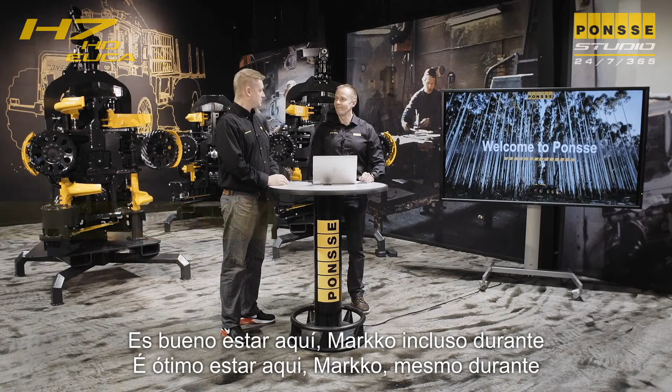Nice to be here, Marko, even during this kind of difficult times. So we are happy that we are able to launch new products during this kind of period. But we have been able to do it, and we have products in the forest. So things are still coming forward. Exactly. Even though we have this kind of difficult global situation because of coronavirus.

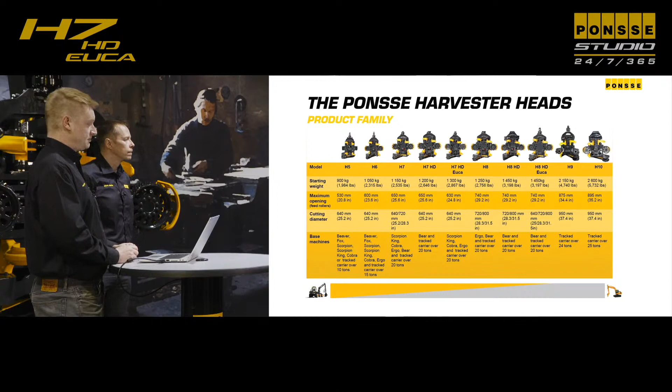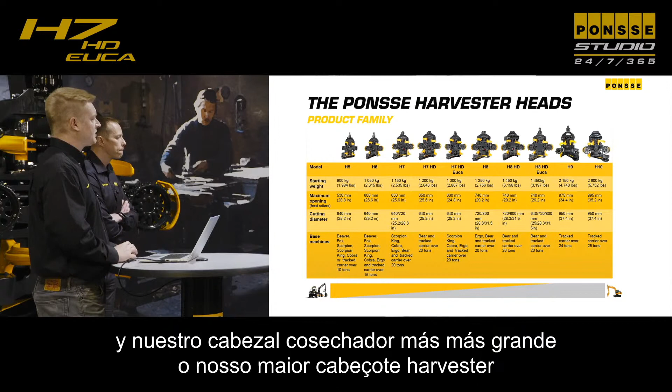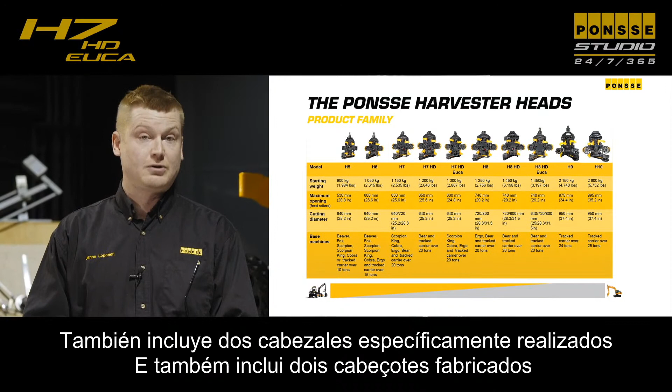It's a very nice head in the thinning operations, even in the smaller log trees, and our biggest harvester head is the H10. And the H10 is already so big a head that you need to have a big track-based machine for that. So our scale is big. It's also including two specifically made for the eucalyptus debarking operations. So debarking is very important for Ponsse, and we have the right products for debarking operations in the plantations.

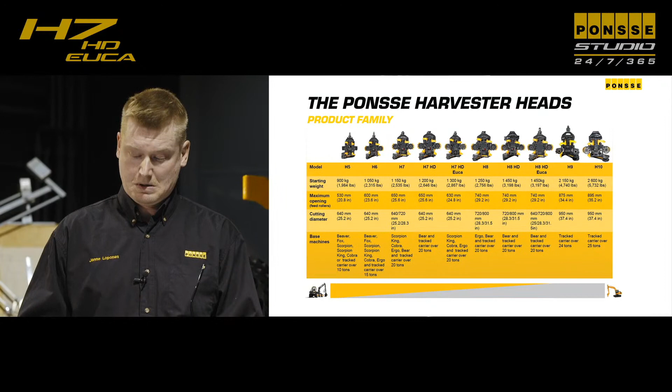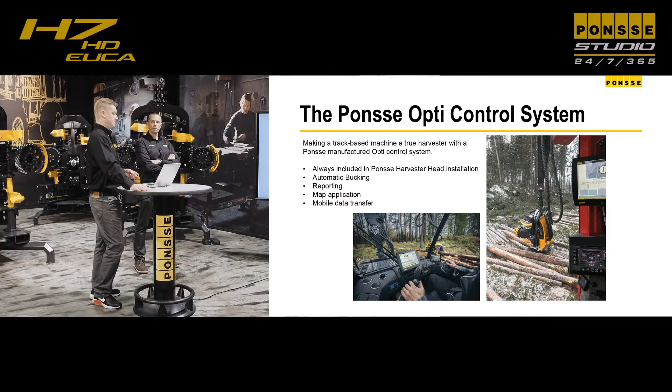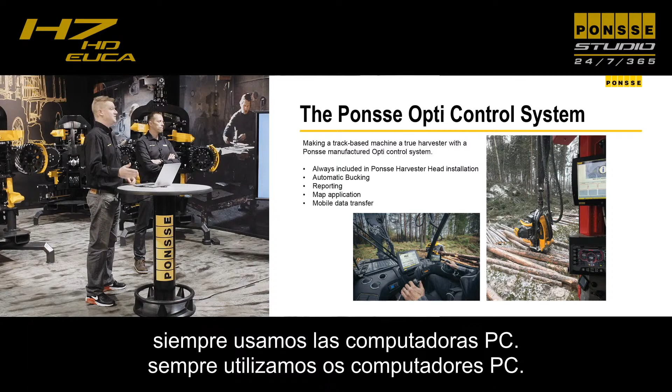Then a few words about our control systems. So Ponsse is designing and manufacturing all control systems. Epec is our subsidiary in Seinäjoki which is manufacturing our modules, PC computers, and even with the loose head installations we always use the PC computers. We don't have any simple version that shows only the length and the diameter. You always have the whole package when you have a Ponsse product.

Then H7HD EUCA, so this is the robust head, heavy duty head. We're gonna talk more details about the heavy duty later on with our engineering manager, Markku Huttunen. But it's good that everybody is aware. This product is available to our own wheel-based machines, Ergo, Cobra, Scorpion King and the Bear. And then, of course, for the different kind of track-based base machine solutions. Our recommendation is then 20 tons or bigger track-based harvester is suitable for our H7HD EUCA.

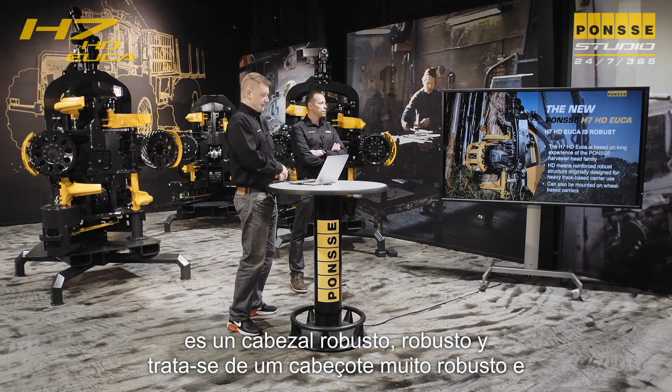The reach of the crane or base machines for the H7 heavy-duty EUCA are exactly the same as previous H7 EUCA. So new product, even it's more heavy-duty, there is no limitation in our base machine. And like I already told earlier, it is a robust head, and heavy duty is not just the two letters in a Ponsse product. It's this really heavy duty frame structure, and we want to show you that here in real life behind me later on.

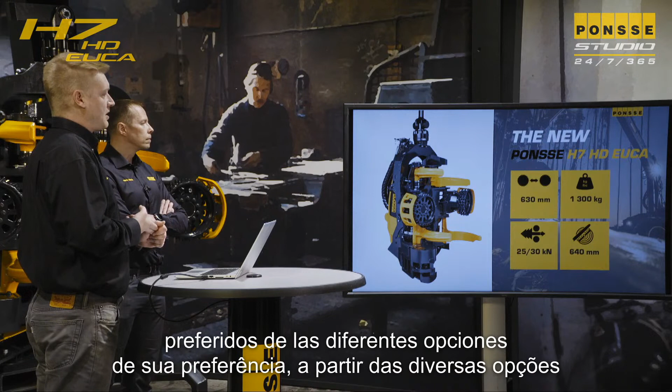Just the basic technical details about the product. The roller opening 63 centimeters, so plenty enough for the EUCA plantations. 1,300 kilograms is the starting weight, and then when you add the rotators from the different options we have to offer, and some options, the weight is coming a little bit higher, of course. We have two different kind of feed motor options.

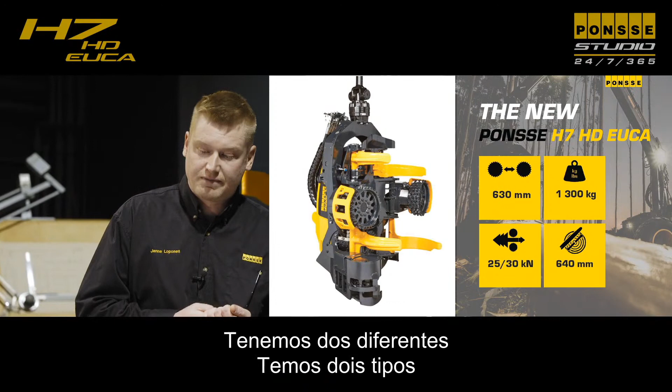We have 25 kilonewtons or 30 kilonewtons torque motors available, based on your condition. There are plantations where the trees are bigger than in another plantation. That's how we can really make a right setup for you in your conditions.

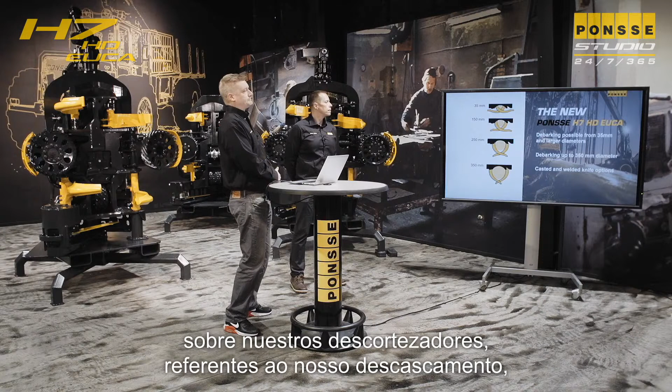Here we have a few pictures about our debarking diameters with our debarking knives. We can see that we can go all the way down to 35 millimeters with the debarking. And then our recommendation is up to 35 centimeters. This is the optimal, suitable debarking range for the H7HD EUCA.

But of course, every plantation also has those bigger trees on the side of the road, so you need to be able to cut them as well. You can do that with the H7HD EUCA also. When your main plantation tree size stays below 35 centimeters, then here is the right product. Then I believe, Marco, we have our product line video, how we manufacture these Ponsse harvester heads.

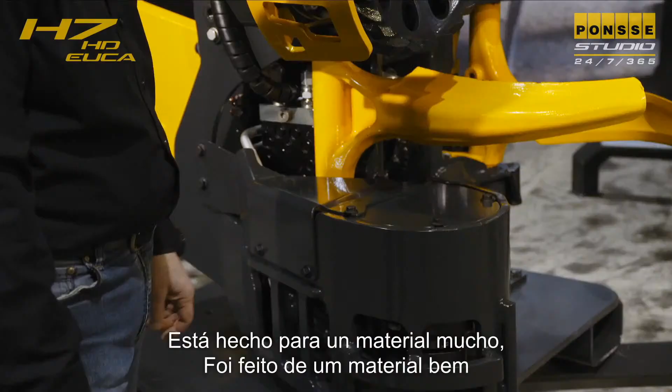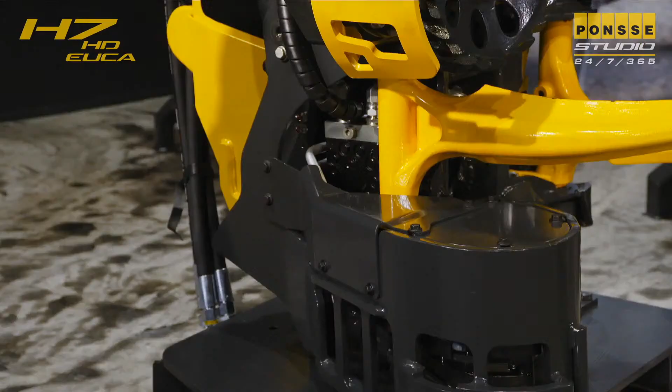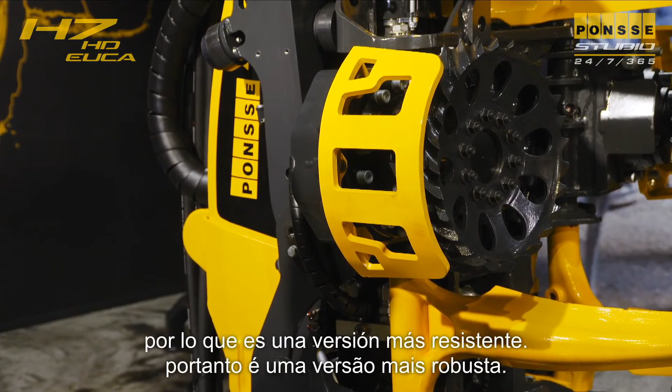Can you point out that this heavy duty really means big changes in the frame? It is not just the covers here, it is something bigger. Yeah, let's start from the saw box. It's I think the main thing. It's made from much thicker material than the previous model. The saw box plate thickness is double compared to the previous model. Then we have this supporting plate added here that connects the tilt frame to the saw box and takes the load from there. Then the tilt frame is also made from thicker steel plates, so it's a more heavy duty version.

Exactly, and before the H7 HD EUCA we already had the H7 HD, H8 HD, H8 HD EUCA, and now we have the H7 HD EUCA. Yes, that's true. So our heavy duty product family is growing in our selection. Then we can see also here different type of debarking knives. These are cast ones mounted here, which are optional for our end user.

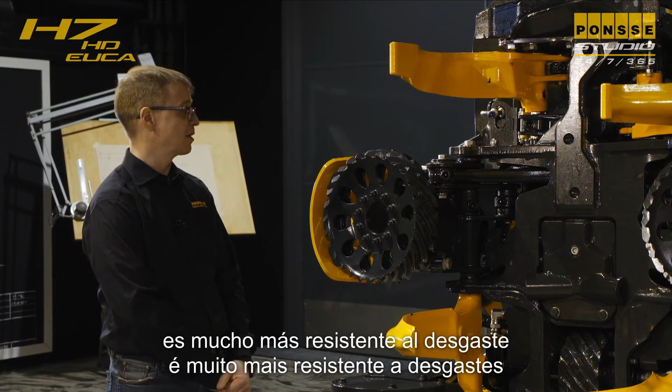Tell us shortly what kind of benefits our customers are getting from these cast knives. Yeah, the main thing maybe is the wear resistance. The cast material is much more wear resistant than the steel that we are using in the welded knives.

And of course the shape, it's much easier to put the material where it is needed in the casted knives. And these knives are also longer than the welded knives, so it has a tip here that is straight and a little bit longer, so it's easier to pick the logs from the ground.

Exactly, and I remember when we were testing these casted knives in South Africa, we already got very clear feedback from the end user that the lifetime is much longer compared to the welded ones. And also this length of the knives, we had these knives in Uruguay for the test, and customers like it when they are turning the harvesting direction in a plantation and they need to pick up the logs from the ground, so they really told them. Now it's easy to pick up the logs from the ground and it makes the operation much faster.

But then we also have a different kind of structure here in front knife axles. So the axles are fixed and you can tighten them with the conical sleeves to the frame. That's true. That makes the whole frame structure even stronger. And that means less maintenance in the frames. So when the customers are getting these products to 25,000, even 30,000 hours, you don't have to do big maintenance to the frames where the sleeves are welded, because your axles are always tight with the conical sleeves over there.

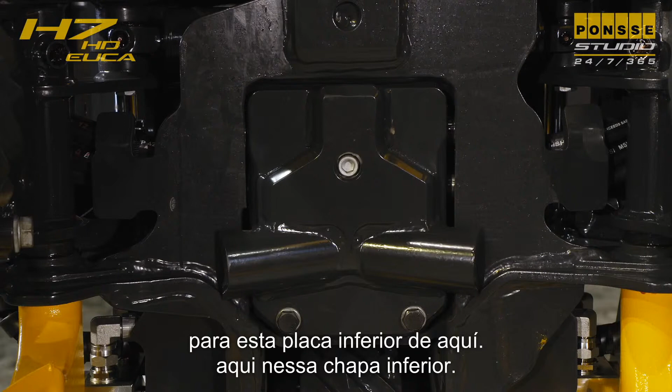Then we can also see that something new has happened for this bottom plate over here. Yeah, the bottom plate in the place of the traditional length measuring wheel, if that is not needed, we have that plate there and it's now fixed with the conical sleeves also to the frame, so it's fixed very tight there, it's not loose anymore, and it's more reliable in the long term.

Exactly. We have started to deliver these products already to China, South Africa, and also to Brazil. And now let's go and take a look at what our customers are saying about the H8 HD EUCA, which we launched 1 year ago, and now the H7 HD EUCA.

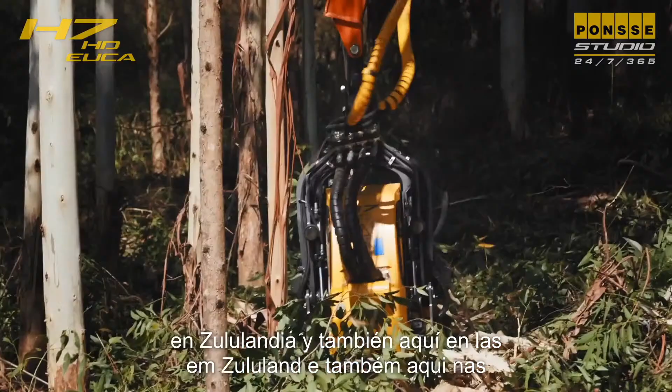Chris, our forestry journey started with my late father in the early 1950s. Back then, my dad was a motor manual harvesting contractor, working predominantly up in the northern parts of KwaZulu-Natal. He did forestry contracting right up until the mid-1990s when I joined him. And in the early 2000s, we started converting to mechanized harvesting contracts. The industry changed and we had to change with the industry. Currently, we're working in the KwaZulu-Natal coastal areas down in Zululand and also here in the KwaZulu-Natal Midlands plantations.

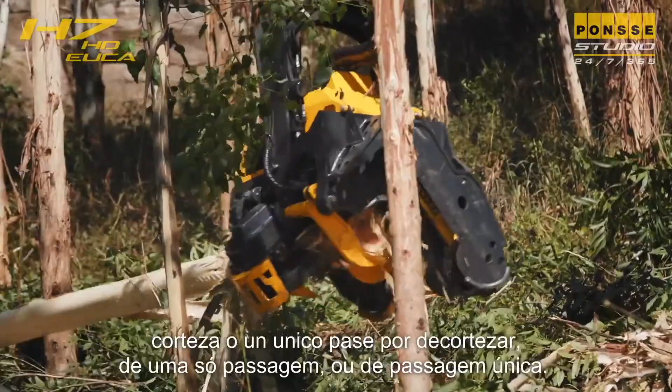You're running 8 Ponsse heads at the moment. Can you tell us a little bit about your feeling about the Ponsse heads and the impact they have had on your environment and your company? Wonderful. Chris, yes, we previously were running 2 or 3 different harvester head brands. We converted to Ponsse 2 years ago purely because we were looking for a harvester head that could give us single pass debarking. Our local industry required single pass debarking, and we found that between the alternatives that existed, the best option was Ponsse. They gave us the best quality, the best performance, and overall the best service. And so our conversion to Ponsse, originally the H7 EUCA head, was a very good decision for us.

Wow, that's amazing. You're also now the first and very proud owner of our very new and latest robust and reliable Ponsse H7 HD. What's your overall view of our new head? Yes.

So to be honest with you, Chris, when we did the conversion to Ponsse, like I said, 2 years ago, we were a little nervous because the H7 EUCA head is a much smaller head than its competition, or at least what we had previously used. And so we were worried about longevity, we were worried about the engineering of the head and whether the head would be durable enough. To our surprise, it turned out that none of our worries were actually factual.

2 years later, the heads are running well. They have clocked up sufficient hours to give us peace of mind that we shouldn't expect any engineering problems, any robust issues around that. To know now that the H7 HD is now an upgrade on that just gives us additional peace of mind to know that the head will be able to cope and handle any harvesting condition that's thrown at it, especially here in the Natal Midlands, where we harvest a variety of trees.

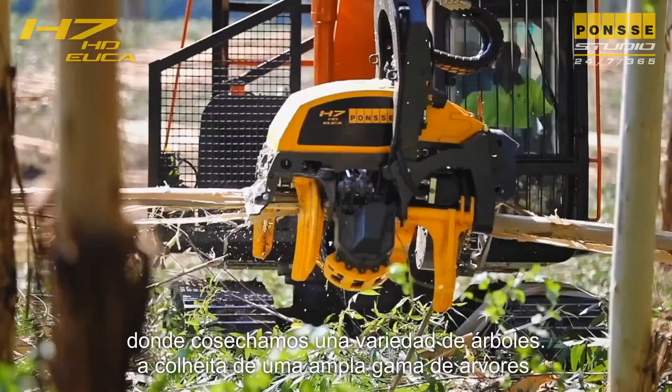We have different tree form, different size trees. The terrain is very different, and to know now that we have a harvester head that we can throw at any job, having confidence that it can do the job, will stand us in good stead. So we're looking forward to a very good relationship with the HD harvester head. That's very, very positive feedback.

You are also running one of our casted knife sets. You've been running that for just over a year now. And what's your experience been now with the longevity of those knives? No problem. So what we experienced originally, Chris, is the harvesting conditions from a soil type are very different between the coastal regions and here on the Natal Midlands. The coastal regions have a very abrasive, high silica content in the soils, where here in the Natal Midlands, the soils are more clay-based.

So what we found down on the coast is because of the high silica content, the knives were wearing, the overall head was wearing significantly quicker than what we anticipated. When we changed to the cast knives, which was now about 12 months ago, we were pleasantly surprised to see that the cast knives are able to stand up to the working conditions down on the coast.

They have not worn as much as the original steel welded knives have worn, and it's been a good move for us. So we are in the process of converting the rest of those harvester heads to the cast knives. We will see here in the Natal Midlands whether it's needed, and if it's needed here, we will do the conversion on this end as well.

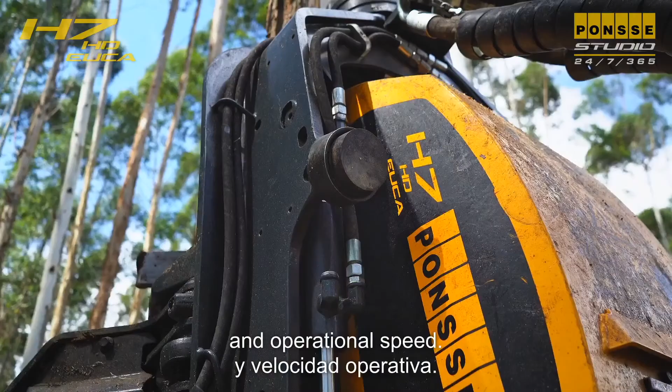Okay, welcome back to Ponsse Studio. Very nice videos. Would be nice to visit again soon those places. Hopefully we get there soon. But thank you for the good feedback and nice videos.

Maybe Janne, people might be interested to know how many of this kind of heads we manufacture in our factory per year. We are manufacturing in Ponsse, Vieremä, more than 1,000 harvester heads per year. So the amount is quite big at the moment. So that actually makes us one of the biggest manufacturers in the world.

Absolutely. But maybe Janne, as a summary, would you like to say a few points still? What should people remember about this new product? Well, first of all, let's remember that H7 HD Euca is available for Ponsse base machines with a wide range of different base machines, from Cobra all the way to the Bear. Then, extremely suitable for the track-based harvester or excavator. Plus 20 tons is our recommendation, but it's even possible to make this installation to a smaller base machine if needed.

Ponsse heavy duty frame, like Markku was explaining earlier, Ponsse heavy duty is not just a name or small plates over there. It means the whole frame structure in the sawbox area, side of the frame, tilt frame, is heavy duty. Then we have these optional cast knives here, which give better durability and longer lifetime compared to welded materials.